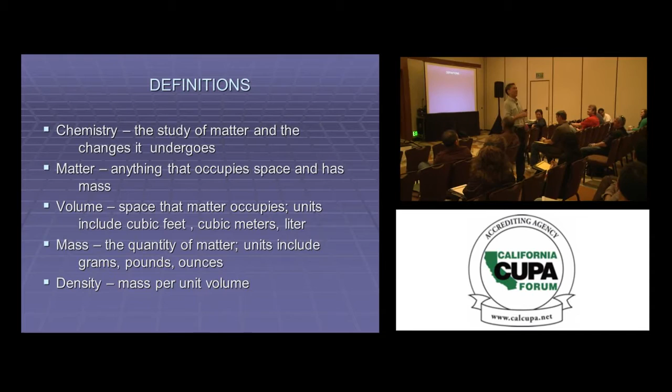So, and before I make fun of them, who are the lawyers here? Okay. Are you a prosecutor, ma'am, or I guess a freelance? I doubt. Oh, she dabbles. Okay. Okay, I won't make fun of lawyers because there's one here. So, anybody from CHP?

Okay. Let's start off with some definitions. Because you see, this is basic chemistry, okay? Basic chemistry. It will refresh your memory if you've had Chemistry 101 like, what, 10 years ago or something. To some of you, less than that.

I work for Los Angeles County, and I've been with the County of Los Angeles Fire Department, the Hazardous Materials Division, for 21 years. I started when I was 52. I just use a lot of moisturizer, okay? No. You see, there's a story there, because I've been doing this CUPA conference thing for 5-6 years now, and I've always said I've worked for Los Angeles County Fire Department for 21 years, and I always say I started when I was 12. And then there are blank faces, like, really? He's that young? So now I'm doing it the other way. Really? He's that old? But okay, I use a moisturizer. Like you, sir. Just kidding. Oh, it does work. Look at him. But no, there is a reason why people don't sit in the front, Margaret, but you did. So, suffer the consequences. Just kidding. Let's start off with some basic definitions. Again, this is basic chemistry, so let's start off with... am I too loud? Yes, for you, because you're in the front.

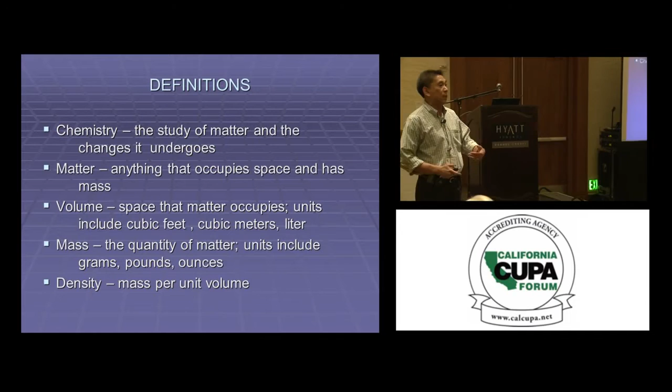To those of you who are nuclear physicists, are there some nuclear physicists here? No. Pounds is actually not a unit of mass, they say, it's a unit of weight, because it's the measure of gravity, but this is basic chemistry, so let's keep it simple. The units of mass can be grams, pounds, or ounces. Density is the mass per unit volume. Why do I go to the basics? Because as inspectors and emergency responders, you read material safety data sheets, you read the densities of materials, and you have to go back to the basics to determine if it floats, if it sinks, if it's heavier than air, and so on.

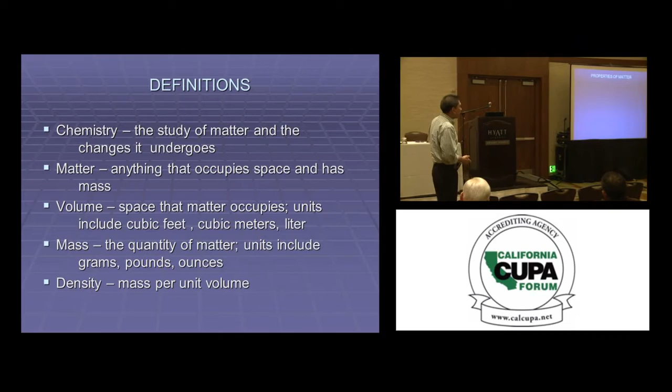Now, since we are talking of matter, let's talk about the properties of matter. How many physical states of matter do we have? Sir, how many physical states? 3. He said there are 3 physical states of matter, and those are solid, liquid, and gas. For basic chemistry, correct. And you're saying no, there are not 3 physical states of matter.

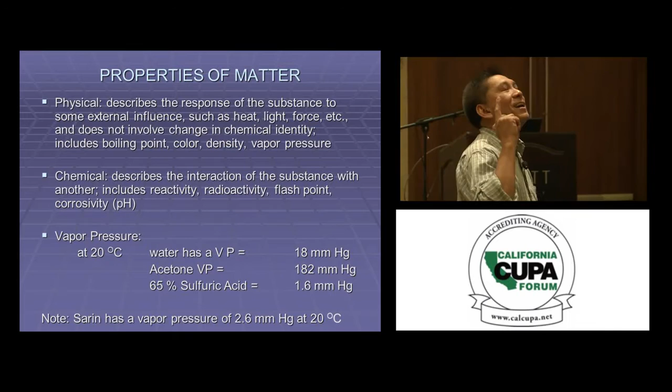And you are? What's your name, sir? Jose. And you are from? San Diego County. Where's Mike Vigier? Is he here? No, good. So I can make fun of him. No, I can't make fun of the chief.

So you're saying it's not 3 states of matter. So how many are there? 4 plus? Possibly 5. Actually, the nuclear physicists are coming up with, well, what about the flame? The flame itself is not solid, liquid, or gas. It's something else. But this is basic chemistry, so we return to what he said. There are 3 physical states of matter: solid, liquid, gas. But those solids, liquids, and gases have properties. And what are their properties?

Physical properties describe the response of the substance to some external influence, for example color, density, vapor pressure. Chemical properties describe the interaction of the substance with another: reactivity, radioactivity, flash point, and corrosivity, which we'll talk about with pH later. Now, as far as properties are concerned, if there's anything you will learn from this class, it is this: the vapor pressure.

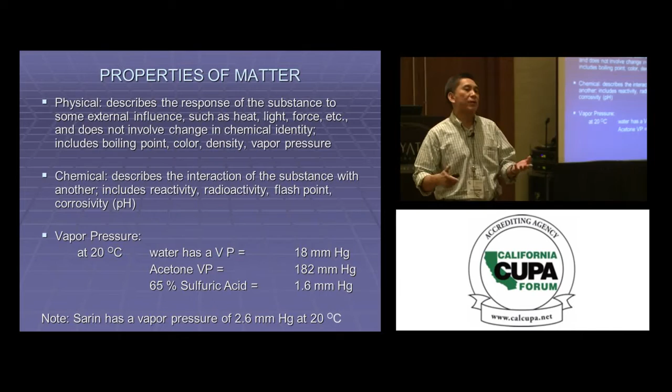Water has a vapor pressure of 18 millimeters mercury. Acetone, you know how acetone evaporates readily, has a vapor pressure of 182 millimeters mercury at 20 degrees centigrade. And concentrated sulfuric acid, 65%, is 1.6 millimeters mercury. Okay? That should not happen, but okay.

So all you need to remember for vapor pressure, when you're reading a material safety data sheet, an MSDS, when you're going to an inspection, is 2, 20, and 200. If it's closer to 200 millimeters mercury, it evaporates very readily, right? Now, if it's closer to 2, it doesn't really evaporate that much, like sulfuric acid.

But as hazardous materials specialists, you have to understand that even if the vapor pressure is close to 2... Sarin has a vapor pressure of 2.6, so does that mean I can come close to sarin? Of course not, because the toxicity is really, really high. A very, very small concentration of sarin can give you detrimental effects to your health, okay?

Speaking of which, there's an introduction to toxicology class on Thursday. I just met the instructor. Don't go there. No, I'm just kidding. She's a doctor for NOAA. Her name is Karen somebody. She's very nice. I will attend her class, so I'm inviting you to join me, to support her. I don't know her. Anyway, going back to vapor pressure.

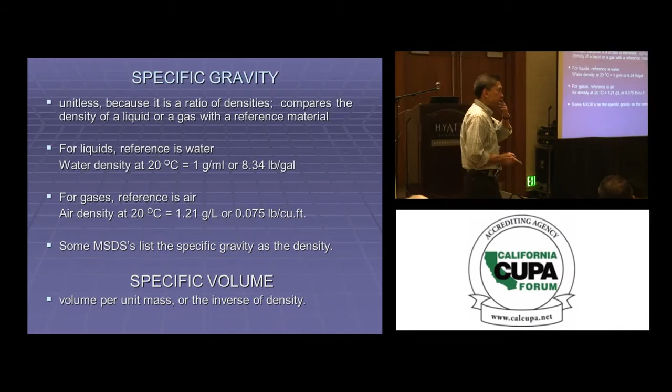Okay, for gases, the reference is air. The air density is 1.21 grams per liter or 0.075 pounds per cubic foot. Some MSDSs list the specific gravity. This is one of the errors MSDS writers make, because specific volume is just the opposite of density, but sometimes they list it as density when it is actually specific gravity. They put density equals 1.5, and there's no unit because it's a specific gravity. It's not a density. Okay?

Now, chemistry is the study of matter, so we have to, I wonder if we can pause this. Does anybody know PowerPoint? Of course you do, but you won't help me, right? I'm on my own. Where's Carl? Carl Palladino was here in the previous class, and he helped the other guy. But anyway, I hope it stays.

Matter can be divided into 2, pure substances and mixtures, and mixtures can be divided into 3: heterogeneous mixtures, suspensions, and solutions, and the pure substances are elements or compounds, right? I usually talk about heterogeneous mixtures and suspensions to get them out of the way. Heterogeneous mixtures are mixtures of pure substances, and if you take a part from the top and a part from the bottom, it's totally different. They have different concentrations, different composition. It's not homogeneous. It's not identical.

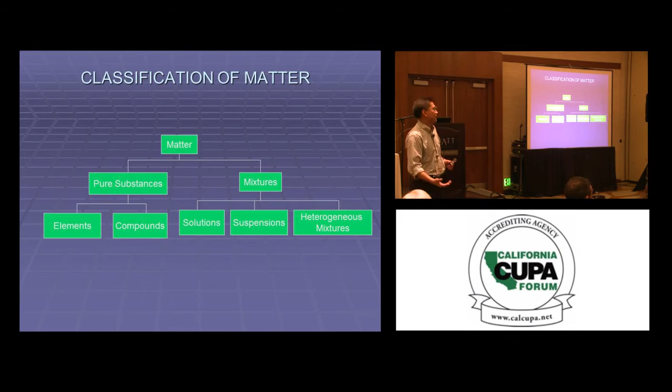You know, the people standing at the back, there are plenty of seats right in front. Join Margaret so I can pick on you. No, I'm not going to. I promise I won't pick on you. There are actually seats here and there. Please. We will pause the presentation for these latecomers. I'm sorry. Those who drank coffee first before coming to our class. No, thank you. Thank you very much for coming, actually.

Sorry. Okay. So heterogeneous mixtures, that is very clear. A mixture wherein there are three states of matter is a heterogeneous mixture. If there's a solid, a liquid, and a gas in the water, like beach water. Beach water has solids in it, it has dissolved oxygen, which is a gas, and then there's the liquid, the water itself. That's a heterogeneous mixture. That's beach water for you, especially Santa Monica beach water.

Ooh, that is really a mixture, right, sir? You're from what company? I'm with the Environmental Training Center. Oh, Environmental Training. You're home-based where? I know as much as you do, so be careful.

Whoa! But I have the microphone. There you go. Because he said that he knows the same, as much as I do, or maybe even more, but I have the microphone, you see. That's my...

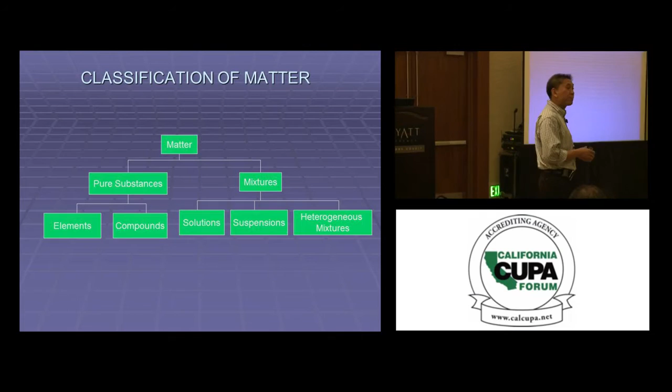Okay, suspensions. Suspensions, that's kind of a special classification of matter for me, because I know some of you have heard this already before, maybe from my previous chemistry.

Oh, it did. Thank you. Thank you, God. Thank you very much.

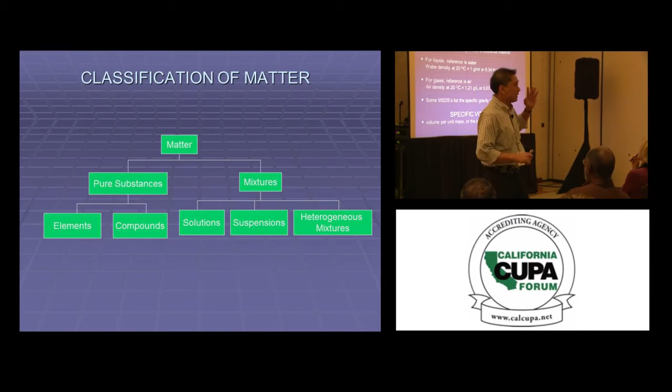From my previous chemistry courses, I always talk about my son, because my son is allergic to a lot of different things. And one of the things that he's allergic to is milk. Milk is the most basic example of a suspension. So meaning there are solids suspended in the liquid, right? There's butterfat that's suspended.

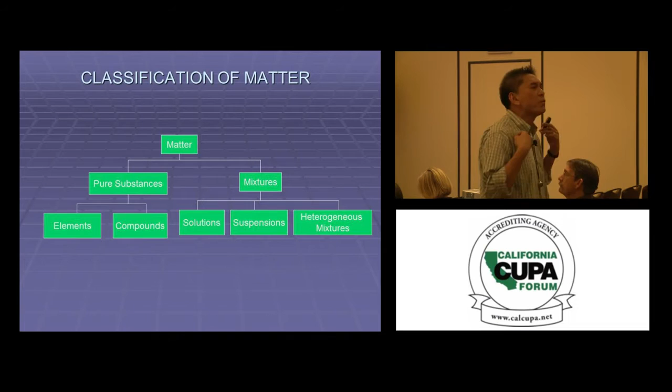Now, if my son wants to eat Jell-O, and we find some Jell-O that's kind of cloudy, then we know there's milk in it. But if it's red clear, it's strawberry or whatever flavor, but it's not cloudy, then there's no milk in it. He can eat it. So that's why I always give it as an example.

Another example is if you have an organophosphate. Most of you are inspectors, right? And you inspect. Is that ours? No, that's not ours, huh? Let's just all riot and then, okay.

Anyway, my point is, organophosphates emulsify. If you drop something into water, it just emulsifies and makes it cloudy. And that is an emulsion, and that is a suspension, okay? So we're done with suspension and heterogeneous mixtures. Now we go to the elements and the compounds.

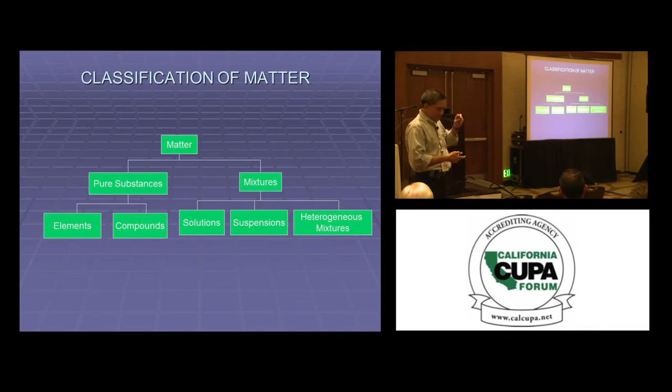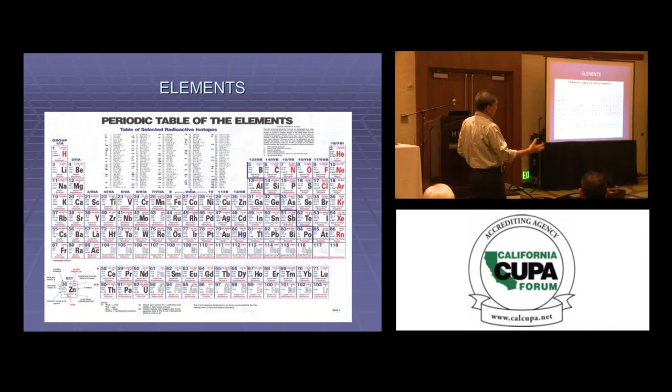Thank you. Now, when there's a periodic table, we have to talk about the elements, the atomic number. What is the atomic number, James? The number of atoms in that element.

Is that me? It's next door. It is next door. Okay. Because I don't want to alarm these two gentlemen who know as much as I do. I keep an eye on you.

Atomic number is actually the number of protons in the nucleus. And if the element is a free element, if it's a stable element, it must have the same number of electrons. Okay. It must have the same number.

Everything is screwy every time I make a presentation, so bear with me, okay?

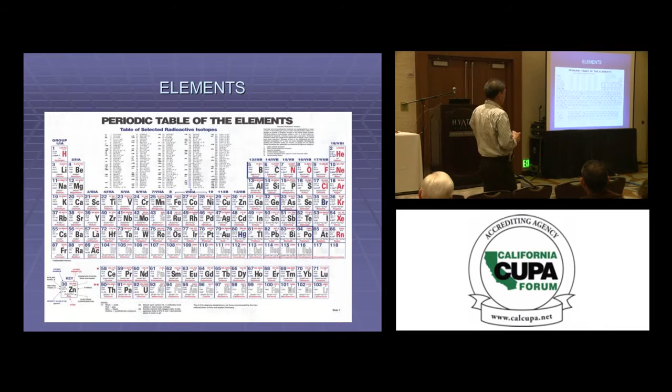On the periodic table, on the left-hand side are the metals, and the right-hand side are the non-metals. And at the very end of the non-metals are the noble gases. The noble gases on the very end have 8 electrons in their outermost shell. What is an outermost shell? The outermost shell is the area where electrons are active, meaning they can be shared, they can be transferred, they can be given away, and so on and so forth.

But the thing is, the group 8 noble gases, they are very, very stable, okay? So all these other elements would like to be a noble gas.

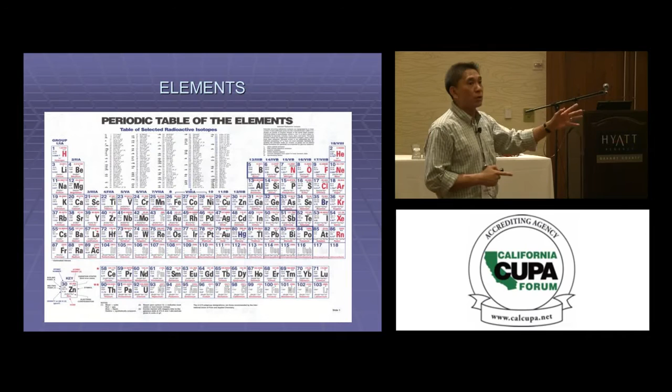I mean, I would like to be as noble as he is, but is he noble? That's the question. We will find out later, right, sir? What is your name, sir? Will Powers. Will Powers, really, that's a very strong name, but Comandante is stronger. Anyhow.

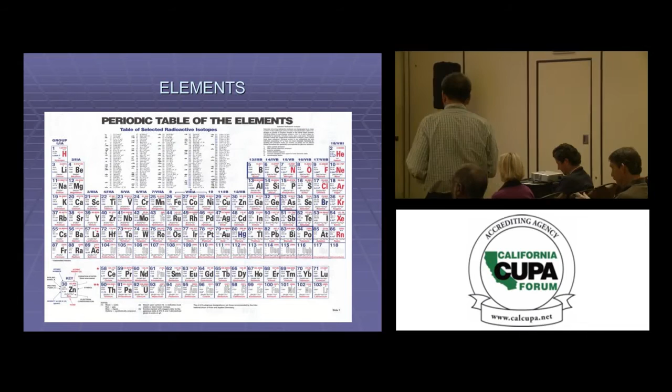Okay, so all these other elements have their protons and electrons, but they want to be as stable as the noble gases. So if they have 7 electrons in their outermost shell, they just want to take one from somebody else, like James would do. Right, James? You will just grab one, just so you can be stable. But sometimes Margaret, instead of taking one, will give away all of her 7 because she's a giving person, just to make sure that the outermost shell will still have the stable number of electrons.

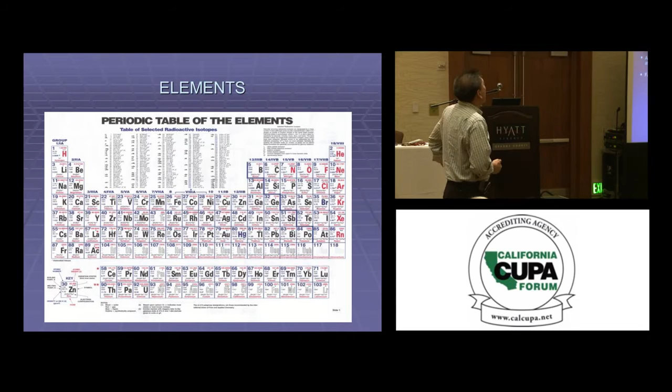And that's what happens in making compounds, right? We talked about the atomic weight, atomic number. That's not very important. Does anybody need to know that? No. Okay, go. Oxidation states. The oxidation states are the charges the ions carry, okay? If they are positive, they're cations. If they're negative, they're anions, right?

Now, meaning if James took 1 electron from Margaret, he will have 1 electron more than he needs to balance his state of being. Like if he has 7 electrons and 7 protons, the positive versus the negative, it will actually just balance itself out, right? But then if he takes in another extra electron from Margaret, he will have more negative particles than the positive particles. So he will be a negative ion.

And he is. He seems negative to me. And Margaret seems positive. You see, that's a trick there.

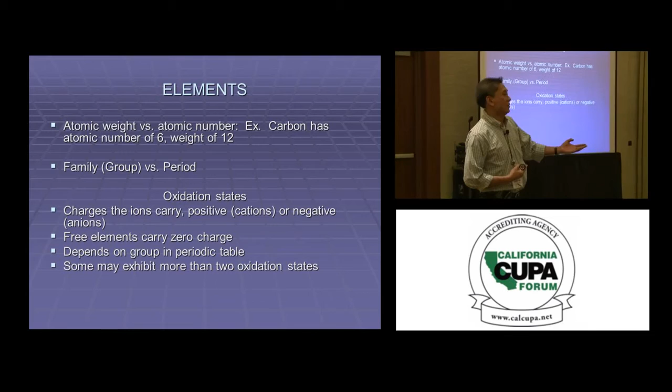Anyway, free elements, I told you, carry 0 charge, and it depends on the group of the table, the vertical structure of the periodic table. If it's group 1, then it has 1 electron in the outermost shell, so on and so forth. Some may exhibit more than 2 oxidation states, meaning those transition elements in the middle, because they have so many electrons in more than 3 shells, right? So those electrons can just jump from one shell to another.

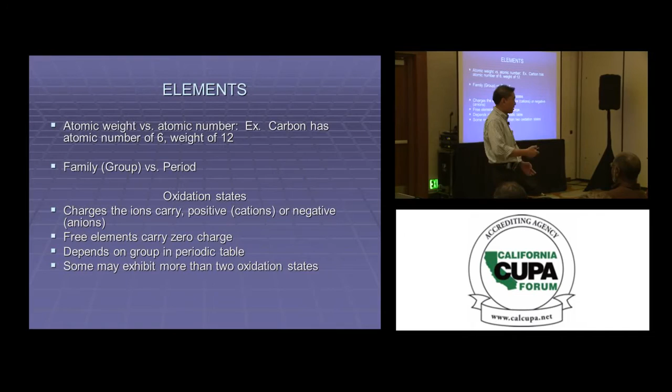Now, the compounds are made based on the octet rule. As I said, they want to be stable. So they want to get 8 electrons because they think they will be stable, because the noble gases have 8 in the outermost shell. So that's what James does. He just takes away 1 electron. The bonds may be ionic or covalent. Ionic means you just really give it away.

But then sometimes Margaret and James are very friendly with each other. Are you? No, they're not. They're not. They don't even share anything.

Compounds can be salts or non-salts. A salt is a metal plus a non-metal. Usually they are solids. Non-salt is made solely of non-metal atoms. Remember, we talked about the periodic table. The left-hand side are the metals, and the right-hand side are the non-metals. Now, if the compound is made only of atoms on the right-hand side of the periodic table, then that is a non-salt. And it could be organic or inorganic.

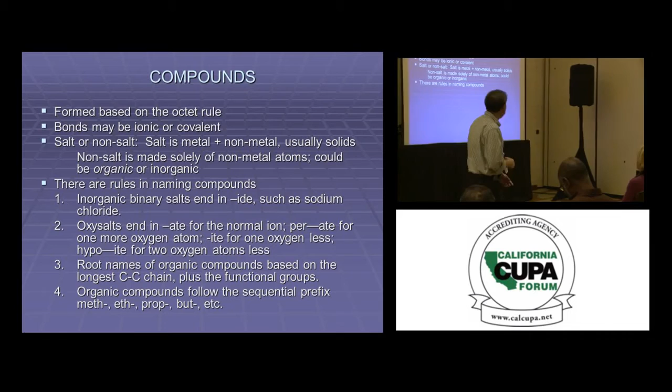Organic, we'll tackle that later because Margaret took organic chemistry like 15 years ago. No, not 15 years, it's 6 years ago, Margaret, right? Oops. Okay. I told you don't sit there. No, she was the very first one who came in, and then I got to talk to her, so. What is your name, sir? Dan. From San Mateo County. San Mateo County, okay. Okay, Dan, watch out. Oops. Where are we now? Compounds, there.

There are rules in naming compounds. Again, what we're touching on are really basics, and then I'm going to tell you stories about my incidents. This will help you, hopefully, when you read MSDSs and when you inspect facilities with exotic gases, exotic chemicals, and things like that. Inorganic binary salts end in "ide," such as sodium chloride. Oxysalts end in "ate" for the normal ion. Permanganate or perchlorate for one more oxygen than the normal ion. "Ite" is one oxygen less. Hypochlorite is the only one that I can think of, for 2 oxygen atoms less.

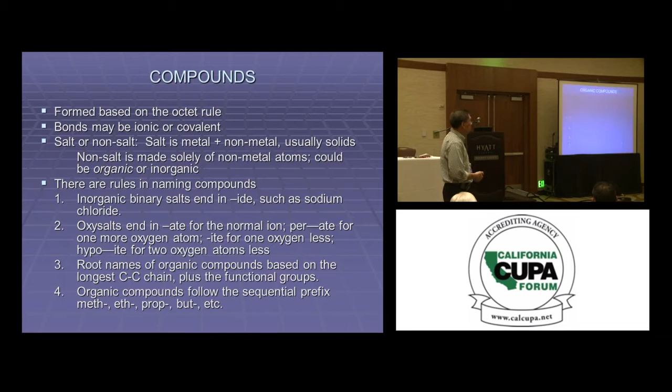Next, the root names of organic compounds are based on the longest carbon-to-carbon chain plus the functional groups. We will talk about the functional groups later. Organic compounds follow the sequential prefix meth, eth, prop, but, like methane, propane, so on and so forth. Now we talk about organic compounds. There are 2 types, the hydrocarbons and the hydrocarbon derivatives.

The hydrocarbons consist only of hydrogen and carbon, and they end with ane, ene, yne, and diene. And the main hazard is flammability. Some are highly toxic, like benzene, which is a known carcinogen. And then some of them are explosive also. Acetylene, calcium, not calcium carbide.

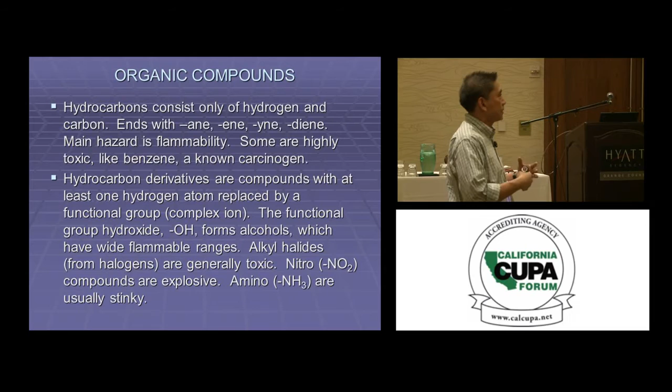But the ones with a triple bond between the carbons, when they are sharing too many electrons between each other, there are 3 bonds, then that is quite explosive. Because the most stable hydrocarbons are the ones that are saturated hydrocarbons, meaning they're saturated with all hydrogen atoms around the carbon atom. Then there are the hydrocarbon derivatives.

These, again, this is just for you to familiarize yourself with the names of chemicals out there so that when you read MSDSs, you don't feel lost.

Oh, no, I'm sorry, like Dan. Right, Dan? Yes, he reads MSDSs. What is this ion?

Anyway, so hydrocarbon derivatives are based on the functional group. Hydroxide, the OH, those form alcohols, which have wide flammable ranges. Now, alkyl halides are generally toxic, like perchloroethylene, trichloroethene, trichloroethane. As long as you have some halogen in it, it makes it toxic. Nitro makes it explosive. TNT.

What is TNT? TNT, Mr.? Trinitrotoluene. And you actually pronounce it correctly, sir.

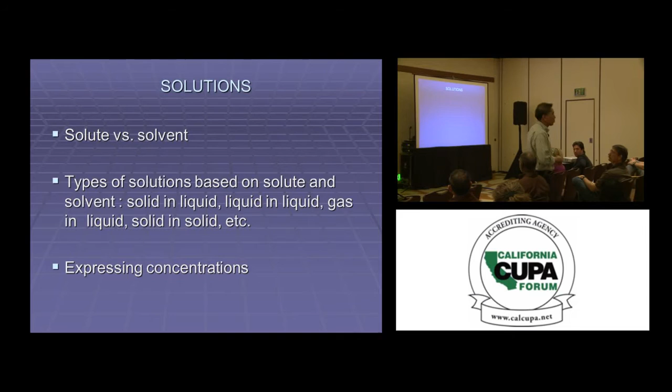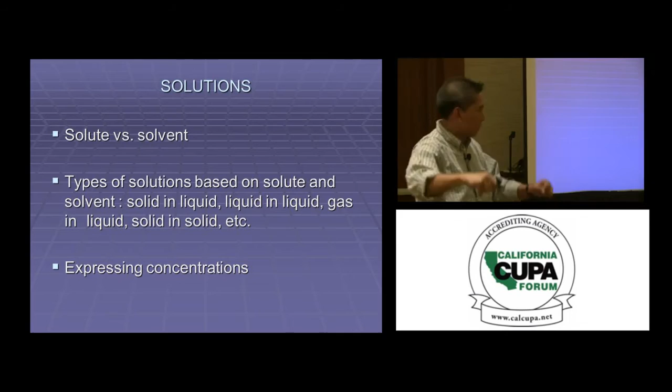All right. Now, the type of solutions is based on the solute and solvent, solid in liquid, expressing concentration. This is the most important part for solutions. We talked about the elements already, and we breezed through the elements. Now we're breezing through solutions.

I remember when I was in middle school or high school? I don't remember now, because I'm 73 years old. I use a lot of water.

When we talk about solutions, the main subject is ways of expressing concentrations. And for goodness sake, you need this. You need calculations in hazmat chemistry, because this is by far the only thing that you need for solutions. You need percent concentrations by weight. You need to know about molarity. You need to know about pH. pH is the negative logarithm of the hydrogen ion concentration.

Molality is not used much, but in one of my incidents, I had an ice making company that has a salt solution, and he has to express the solution in terms of molality, because that gives him an idea of how far below 0 degrees centigrade he can go to freeze the ice, okay?

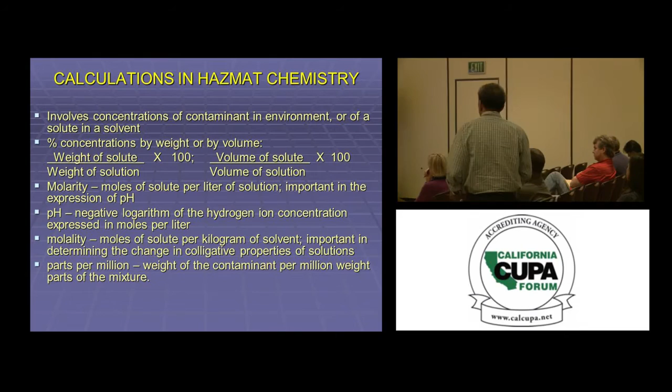And for the most part, you need to know about parts per million. Parts per million is weight of contaminant per million weight parts of the mixture, or maybe volume units also, but for the most part, it's weight of the contaminant per million weight parts of the mixture. Now, in order to understand ways of expressing concentrations of solutions, you have to go to dimensional analysis. You have to understand that. All these you have to be familiar with.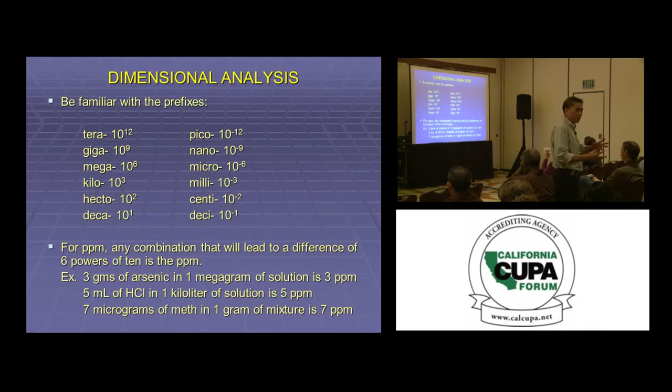Thanks to Apple, iPad, and all this digital technology, now we know about nano. And we know about giga. Now I know about tera, because there's an external hard drive on sale for $500, 1 terabyte. Is it $500? No, it's only $200. Jose, you're overpricing. No, it's only like $99 for 1 terabyte. So it's 10 to the 12th.

Now for ppm, any combination that leads to a difference of 6 powers of 10 is parts per million. So if you have 7 micrograms of meth in 1 gram of mixture, that is 7 ppm. Why? Because the difference in powers of 10 is 6. There are micrograms of meth in 1 gram.

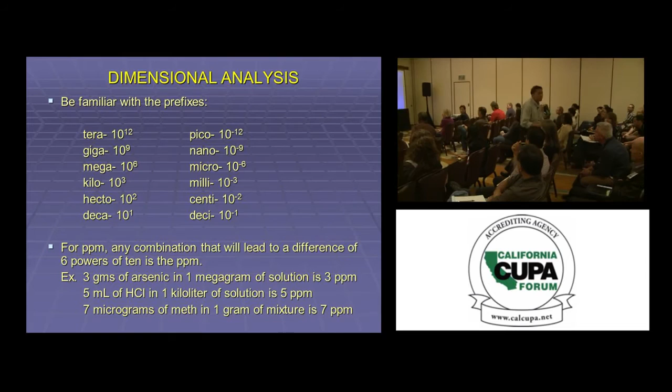Is that correct, sir? What is your name, sir? Jed. Jed? And you're from what county? City of Vernon. City of Vernon. We're practically neighbors, Jed. I'm from Los Angeles County. I should see you. And I asked him because I was in the mode for meth, and I saw him.

I just saw him because he's right here. What are you implicating? Nothing. Okay. Sorry, okay? Are you a lawyer, by the way?

No? Okay, good. Okay. Be familiar with the conversion factors. I'm sure you are all familiar with this. But again, remember, this is basic chemistry, okay?

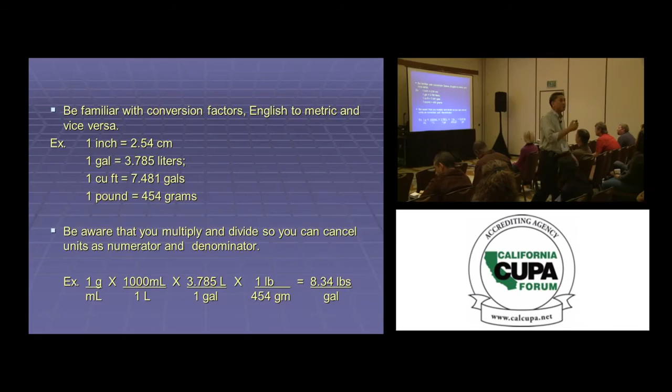Buffer solutions. Buffer solutions is a mixture of a very weak acid and its conjugate base. For example, acetic acid and sodium acetate. When you mix it together, any acid that you add or any strong base that you add, it will not affect the pH. That's why it's called buffer solutions. Let me see. You know, like a buffer is like some sort of a shock absorber, okay?

So you do know that, for example, if you have 1 gallon of, let's just throw it out there, maybe pH 5 of a solution, and then you add 2 drops of concentrated hydrochloric acid, the pH will go down, right down to pH 1 because it's logarithmic. Remember, what do you call this? The ways of expressing concentration. pH is the negative logarithm of the moles per liter of the hydrogen ion concentration.

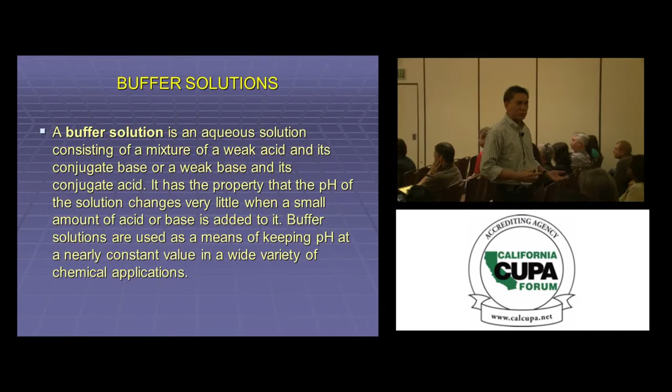And now, anticlimactic again, I again prepared for this line, but what can I say? This thing is not cooperating with me. My buffer solution in life, I am so stressed actually at work, I'm stressed. Can't you tell? I just use a lot of moisturizer. But this is my buffer solution. My son and my 13-year-old daughter. Wait, you were supposed to say, "Aww," because you see the problem is it was anticlimactic. I know. But who has 13-year-old girls here? Can we talk afterwards? I really need help. Can't you tell I really need moisturizer? Because I mean, she looks fine, right? But then at home, it's another story. Okay.

Now, this thing here is the video, but it doesn't work on the PowerPoint, so I have to.

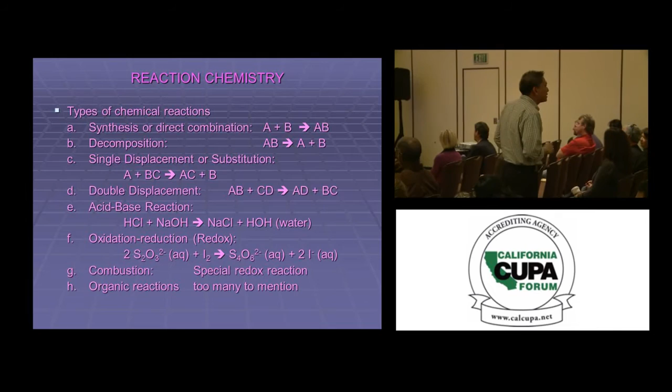What can I say? I can only be good in one thing. That's what my wife kept telling me. She laughed. Why did she laugh at that joke? You're not supposed to laugh there because it's about my wife and it's about me.

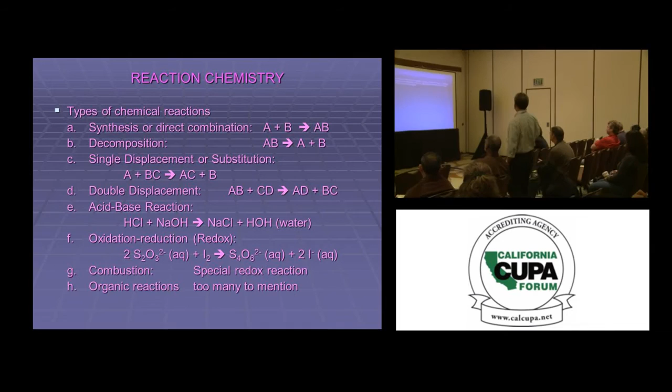Anyway, combustion, which is what happens with the gasoline tanker, is a special redox reaction, okay? Oxidation reduction reaction involves a change in oxidation state. The oxidation state of free elements is 0. Some elements may exhibit more than 2 oxidation states. We talked about that. This is just a high school chemistry thing. The oxidizing agent, which is the oxidizer, gains electrons, GE is for gains electrons. R is for reduced. Oxidizing agent is for OA.

So that's just to give you an idea of which element is gaining electrons and which element is the one reduced. Non-metals usually act as an oxidizer, and the metals act as reducing agents. Group 1 metals react violently when oxidized. And then the activity series gives you an idea of which metals can release hydrogen from water or can release hydrogen from acid.

Combustion, which is what we saw in the very first video. We have slow versus rapid combustion. Just keep in mind that the sudden evolution of gases creates excessive pressure. When there's the reaction, that will give you a big bang, which is what we got at the titanium fire. Slow combustion takes place at low temperatures. It occurs at the molecular level.

Actually, I don't have that incident anymore in the PowerPoint presentation, but I had an incident where there was a spontaneous combustion. It does happen, spontaneous combustion. Right, Jose? Yes, correct answer. It does happen. But spontaneous human combustion, does it happen?

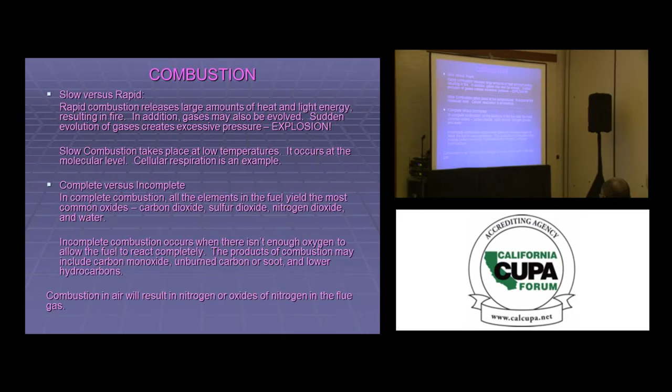Incomplete combustion, complete combustion: all the elements convert to carbon dioxide and the common oxides of the elements. But if there's incomplete combustion, that is the problem, which we will tackle with the tanker fire at Freeway 60. Combustion in air will result in nitrogen or oxides of nitrogen in the flue gas.

Now let's talk about the more interesting part, right? When I tell stories about the incidents that I go to, okay? We will talk about the tanker fire on the 60 freeway, the aluminum powder, which is actually my favorite incident of all time, and I will tell you why. Remember, I've been with the county for 21 years. I did emergency response. I was responding to incidents for 11 years. So I did get quite a bit of chemical incidents.

And I usually relate it to chemistry, because there's always chemistry around us, especially since we're in the environmental health field. It's a good thing that you came in numbers. That's good, thank you. Because they always say, you don't need chemistry. No, you do. You cannot remove chemistry from hazardous materials. Does everybody agree there? You cannot remove chemistry from hazardous materials.

And when I go to an incident, I see, is there chemistry involved? And actually, there's always chemistry involved. But sometimes it's just so common that it's already automatic, that you don't need to do any kind of thinking or research in your head. So we will tackle the tanker fire on the 60 freeway, the aluminum powder incident, food grade chemicals. We had a recent incident on food grade chemicals.

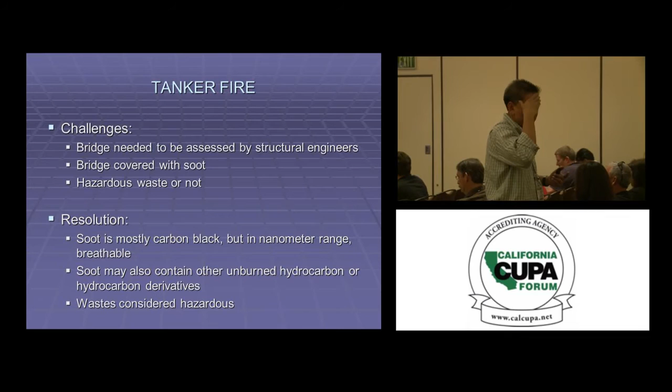Even if it's the fire chief you saw in the video, it was actually I who was there in all the executive briefings from the engineers, the transportation, the Caltrans engineers who will make the decision on what to do with the Paramount overpass, okay?

So everybody's challenged. First, the bridge needed to be assessed by structural engineers. Now, we need to know what the products of combustion are. What do you think are the products of combustion for gasoline?

Yes, ma'am. You are from what county? Santa Clara County. Santa Clara County. I know some people from Santa Clara County. And your name is? Chelsea.

Chelsea. What do you think is a product of combustion of gasoline? Huh? Petroleum hydrocarbons. Correct. Petroleum hydrocarbons. Because sometimes they break it down to carbon dioxide or other oxides of nitrogen, but sometimes it just keeps it as is. And that is the problem. Because we only know that the smoke is just full of soot.

Were you surprised that your answer was correct, Chelsea? No. Wow, she's very confident.

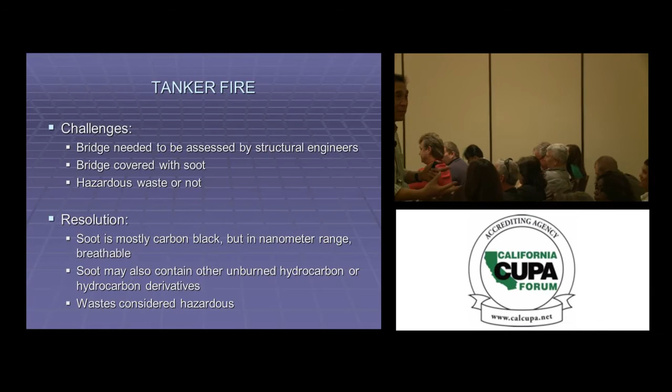No, you see, yeah, because there are petroleum hydrocarbons. 80% of soot is what? Pure carbon, elemental carbon, okay? Pure carbon. But soot still has some unreacted petroleum chemicals, petroleum hydrocarbons, which is what her answer was. She answered the 20%, I'm answering the 80%.

So it's elemental carbon. So the bridge is covered with soot. And now the soot, we don't know if there's benzene there or if there are other petroleum hydrocarbons there. So we had to make sure. So the question was, is it hazardous waste or not? If it were just elemental carbon, would it be hazardous or not?

Who's a hazardous waste inspector here? I know Jose is a supervising hazardous materials specialist, right? Somebody, come on, be brave. Who is a hazardous waste inspector? No. Okay, then I point. You, sir.

If soot is just pure elemental carbon, would it be hazardous waste or not? It would not be hazardous waste. Can you please explain? And your name is?

Jim. Jim. Sorry, but nobody raised their hand, Jim, so I have to point at you. So, Jim, I'm sorry to put people on the spot because that's just me. I'm sorry. No, but then I help you anyway. I help you, okay? I help you.

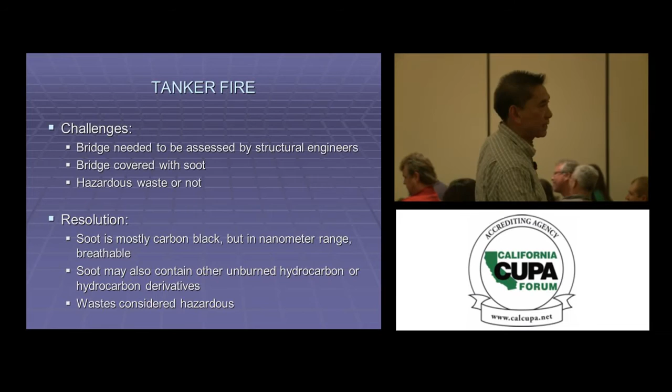Correct. It's not. It doesn't exhibit characteristic waste or any listed hazard, which is hazardous waste 101. It's very, very elementary, basic. If it does not exhibit any of the characteristic waste, or it's not listed under the F, K, U, P lists, then it's not hazardous waste.

Elemental carbon. Well, it depends on the size. If it's very, very small, micrometer or nanometer situation, then maybe it's a possible hazardous waste because it might get ingrained and might cause inflammation and so on and so forth. But in order to find out, you have to attend Karen's Introduction to Toxicology class. Remember in the class?

Sorry, nobody's listening to me now. Okay, hey, this is the more interesting part of the lecture, okay?

So those are the challenges. Now, what is the resolution? Soot is mostly carbon black, but it's in the nanometer range. Some of them are in the breathable range. Soot may also contain other unburned hydrocarbons, which is where Chelsea's answer came in.

Oh, you know what? You saw this slide, Chelsea, huh? That's why you know. I'm just kidding. You're just smart. I know you're smart. You actually look smart, Chelsea. Unlike some people I know who use moisturizer. I'm just kidding, Margaret. Okay, because she's at the front.

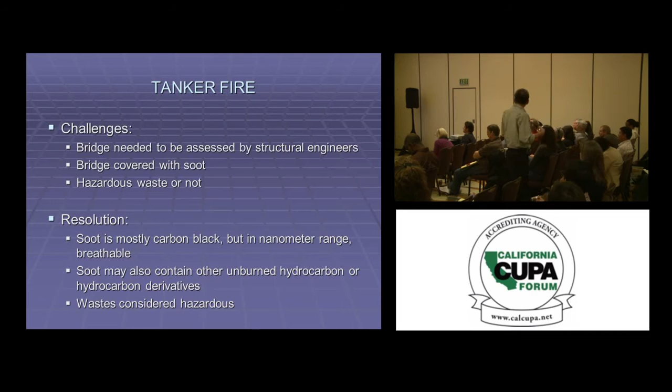Anyway, we have to make a decision on what to do with the soot. The construction engineers, the people who will actually assess the bridge, they're not hazmat specialists. They're structural engineers. They're not HAZWOPER trained. They don't know chemistry, maybe chemistry 101, but that's about it. So they cannot be exposed to hazardous materials or hazardous waste. So we have to clean it up first.

But the question is, if you clean it up, you need to find out whether to collect it as hazardous waste or not. And we made the decision, because 20% might be unburned hydrocarbon, we have to address it as hazardous waste.

Now the next question, since it is in the nanometer range, the contractor, I won't name names, Ocean Blue, sorry, I just did. I know their intention is great. They are after public health too, but sometimes they go overboard, and we have to put a stop to things, because it might be a conflict of interest: if they do more, they can bill more, right?

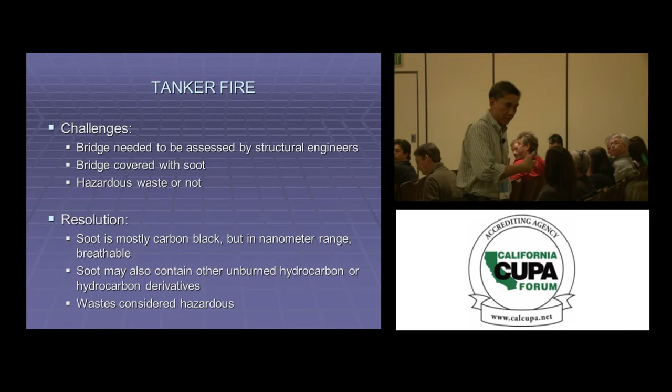So they suggested, it could be in the nanometer range, it's breathable, we can put curtains on the Paramount overpass so we can capture all the dust particles that fly out in the air. But if we do that, how much more time is it going to delay the entire operation? So we had executive briefings with the transportation engineers and conference calls, because this is, I'm pretty sure, over a $6 million project.

So we talked about the nanometer range, breathable range, and the thing is, it's going to happen at night anyway. So we said no to the curtains. We just pressure washed and made sure everybody is at a safe distance, so that everything that's wet is going to go down eventually. They're not going to be suspended in air like the aerosol in air we talked about.

Thank you very much, ma'am, for attending. Oh, she's coming back. I did that one time and it backfired, but anyway, that's my problem. The evaluation, please. What do you call this?

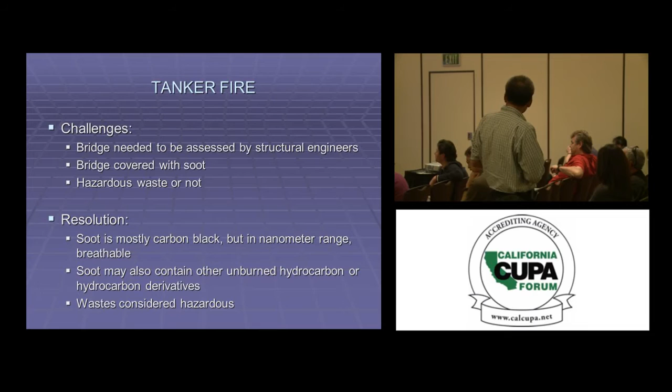So the resolution was not to bring in those plastic curtains to capture the dust particles, because we would make sure the public is at a safe distance, and we're going to do it at night when there's less chance of people getting exposed. And the tanker fire, we opened the freeway not the next day, but in 3 days. It took 3 days because they had to demolish it.

They had to demolish. Eventually, we cleaned it up, right? We cleaned up the overpass, the bridge, and the transportation engineers assessed it. And of course, you saw the video. You saw how intense the heat is, how intense the fire is. So the bridge must have been compromised. So they had to demolish the bridge. And so the freeway was closed for 3 days.

And then the freeway was open, but the overpass was constructed during the weekends only. Of course, they had to get the funding first and so on and so forth. And it did not open until like May of the next year. So it took around 6 months to build the Paramount overpass. So that's what happened with the tanker fire.

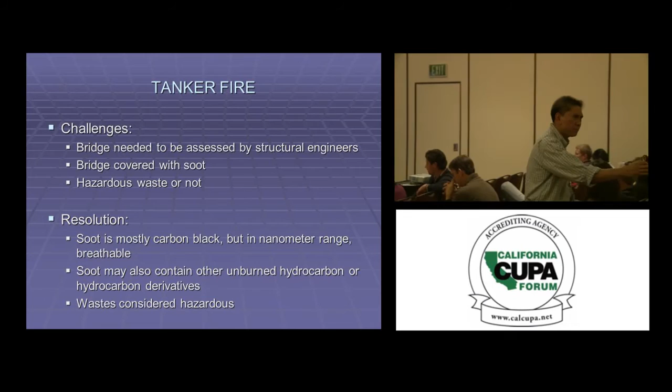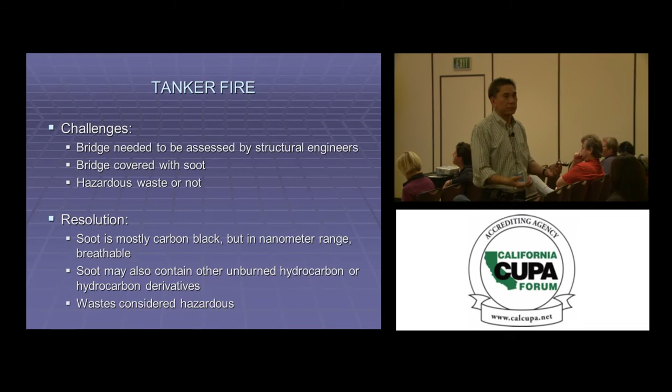And again, there's chemistry all over it. It's nice to be part of the executive briefing when you know what you're talking about. If I did not know what Chelsea said, if it's just elemental carbon, and what Jim was saying, that it's non-hazardous waste, then I could have said, go ahead, just spray everything on and let it go, because it's not hazardous. But because I know what Chelsea knew, that 20% could be unburnt petroleum hydrocarbons or broken down petroleum carbons. Instead of a 24 carbon chain, it became a 12 carbon chain and so on, but it's still hazardous.

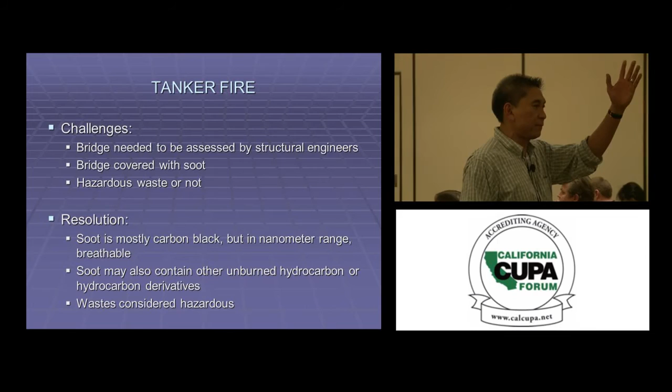Now let's talk about my favorite incident of all time. I don't know if you've heard about this favorite incident of mine, because it's an aluminum powder incident. Again, we're talking about a nanometer range of the powder. This happened at the peak of the foreclosures, like 2008 or 2009. I was asked to respond to a foreclosed home because some teenage kid was asked by a realtor to clean up the garage of a foreclosed home.

Actually, it's not a garage. What do you call those? Not a shed. Well, it's sort of like a tool shed, but it's bigger. And he saw this container. It's not very clear, but it says danger, explosion hazard, contains aluminum powder. But the thing is, we're in central Los Angeles, and it was in Lancaster, which was at least 2 hours away from us. You see, Los Angeles is big.

How big is Lake County? Very small. How big is your population? 2? No, 5. Oh, 62? And you're here, so only 61 are left there? No? 62,000, okay. Because in LA, we have more than 10 million people. And so that's why our houses are like this, next to each other.

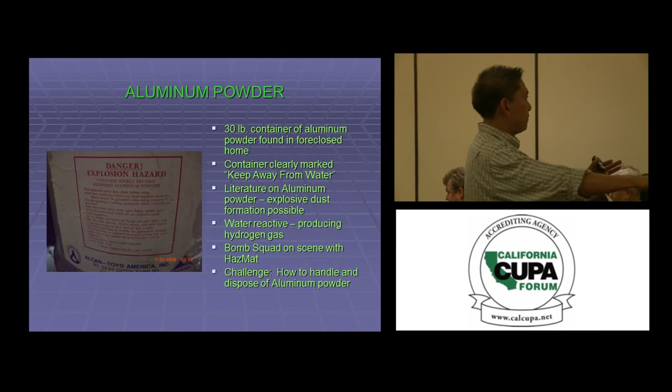I went to Florida for Christmas. Why am I telling you this? Because I want to. Anyway, I went to Florida to visit my wife's family. I wonder why, right? They don't like me, but I was forced to go. And we went to a restaurant at the top of a building with a view of the city, Jacksonville, in northern Florida. I don't know how many stories, maybe 27. No, just kidding. But all I saw were trees. I said, you have too many trees. Where are the houses? Oh, they're all covered, or they're like an acre apart. In LA, in 1 acre, you can have like 100,000 people. They're all crammed up, like a clown mobile, right? Everybody keeps coming out.

The same thing here in Los Angeles County, because of more than 10 million people. It's going to take me maybe 2 hours and 15 minutes to get to Lancaster because of traffic and all the congestion and all these people honking at me. Because I drive like an Oriental driver, okay? So don't drive behind me, nor in front of me, just stay away. Anyhow, okay.

It took me like 2 hours to get there, right? So the teenage kid already called his boss. The boss called 911 because of this danger, explosion hazard. So by the time I got there with my partner, actually my partner was a little delayed. I'll talk to my boss about that.

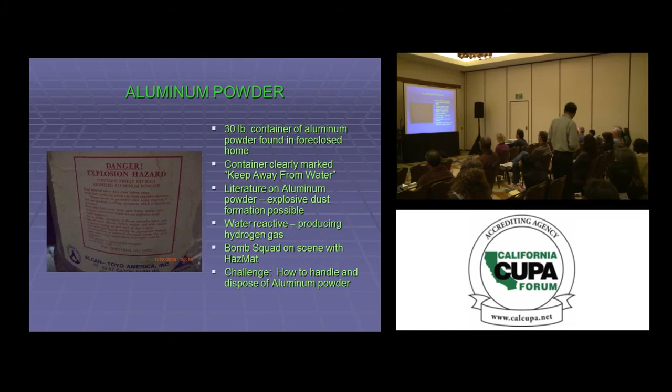So I researched everything and so on and so forth. So I know that it can create dust explosion, but it can also be water reactive.

And the main problem there is the, oh, I should be fast, because I have 3 more incidents to discuss. I talk a lot, huh? Ma'am, I talk a lot. Sorry. Nobody needs a break, right? No. Okay.

Because what is the resolution? Because I looked at all the literature, you cannot put water. Water will produce hydrogen gas for this aluminum. But we all know that we have aluminum cans and they get contact with water and so on and so forth.

Oh, they have somewhere to go. Look at them. Bye. You're welcome. You're missing a lot, ma'am. Oh, but it's okay. You see, my evaluation will go down now.

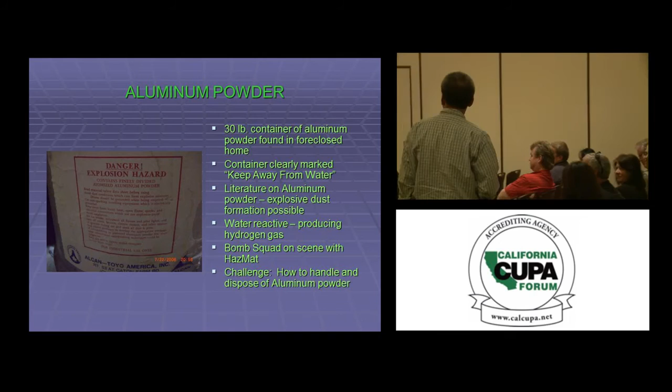It's okay. To avoid dust formation, you need to stabilize the powder. Okay? Meaning, you cannot just transport it dry, or else it will form dust, right? And if it forms dust, then it might have a dust explosion in your hands. To stabilize, meaning to avoid the dust formation, we can use water or cooking oil.

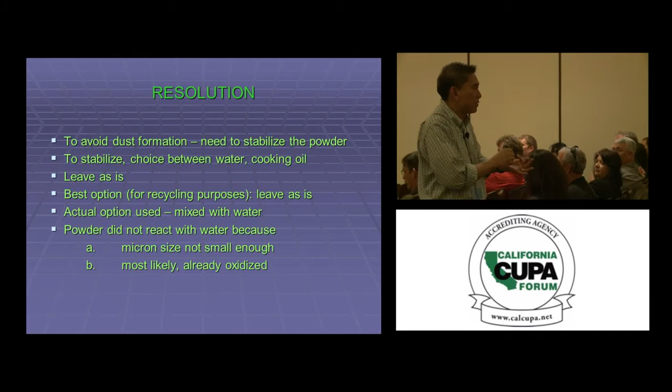And this is actually the nice thing about the crowd there, because we were talking, right? We were talking about hazmat, bomb squad, and so on and so forth. I told them that we have to stabilize because of the dust formation and so on and so forth. And then we said, why don't we do this? We do like a bench scale situation wherein we try first a few things with the aluminum powder, and if it works, then we go all the way with the drum, right?

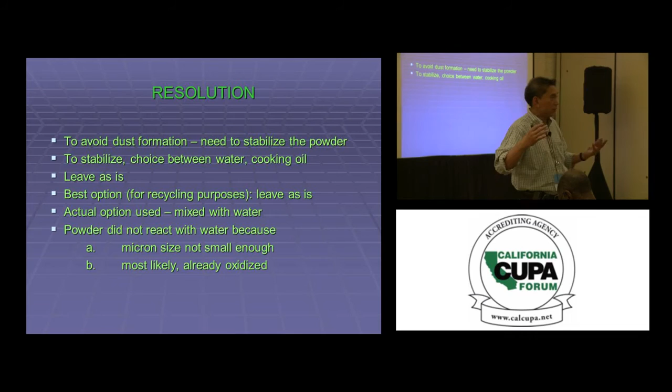So we said, how to stabilize it? We have to make it wet, okay? So what do we wet it with, right? So we told them, well, it says you cannot do it with water, but I have to stabilize it. I said, so maybe the most benign one is cooking oil. So we just asked the crowd, well, actually, I did not ask the crowd.

It's the bomb squad person with a badge and somebody looking like you, sir. And your name is? John? You're not from bomb squad, are you? No, okay. From where? Texas. You're from Texas? Wow, okay. But you're here now, right? And you represent what county? Whole state of California. Oh, you're from EPA? No. DTSC? Industry. Oh, from private industry. Okay, all right. I'm gonna pick on John now because he's not one of us. Just kidding, people. Okay, so not me, the bomb squad person who looks like John, but shorter. How tall are you? 5'11". You see, the guy behind you laughed because I asked how tall you were. How funny is that?

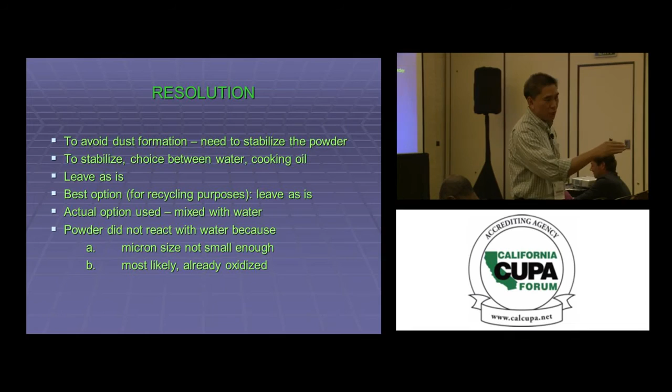Anyway, the guy from bomb squad, not as tall as John, asked the crowd, can somebody give us cooking oil? Whoa, and a lot of people just brought their cooking oil. They brought gallons and some bottles because they just want to get it over with, because the crowd is there and the fire trucks, so much nuisance to their neighborhood. So they brought out gallons of cooking oil just to check it. And I just need like a cup.

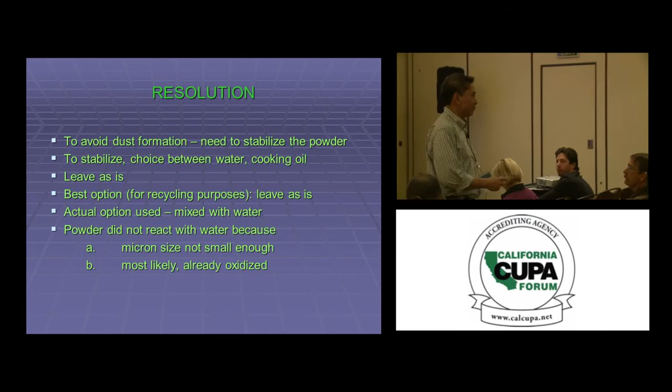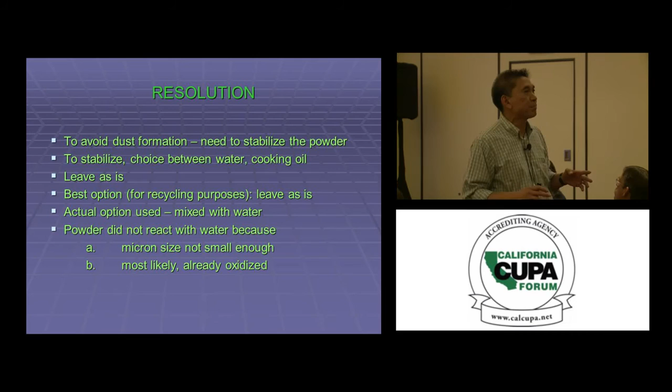The best option, though, in hindsight, is to leave it as is. Why? Because when we arrived, the container was already open. So that means it has already been exposed to air, and it could easily have been already oxidized. But the actual option that we used is to mix with water. I know for a fact that it would have been better to just leave it as is and just prevent it from forming dust. And how do you do that? Just by closing the container. Leave it as is, because there's no dust formation if you close the container, and there's no water reactivity because it has already been oxidized.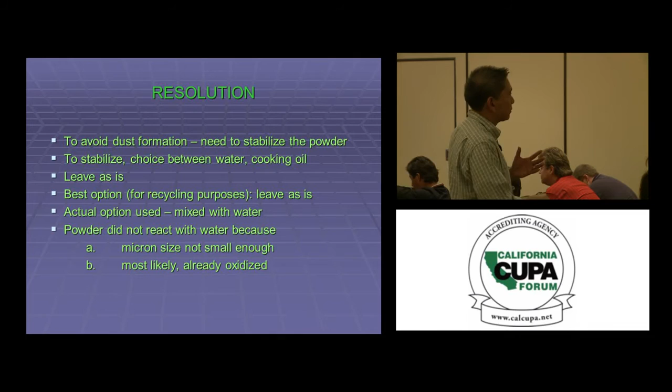But we mixed it with water because we did the bench scale experiment, Jose, that I talked about, in the watch glass. Of course, we were wearing PPEs, and we took a sample. We put a pinch on one watch glass, and then another pinch on another watch glass. We used cooking oil on one, and we used water on the other. With the cooking oil, since it was too thick, it doesn't readily mix with the aluminum powder, so we still had to agitate it and so on. So we said, not a good idea, because if you want to stabilize it with some liquid, it has to readily be absorbed or be wet, okay?

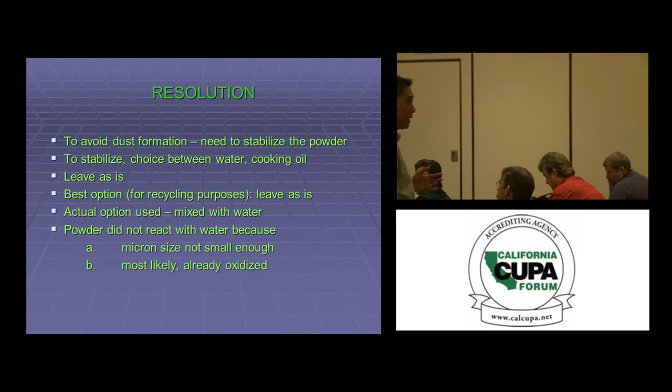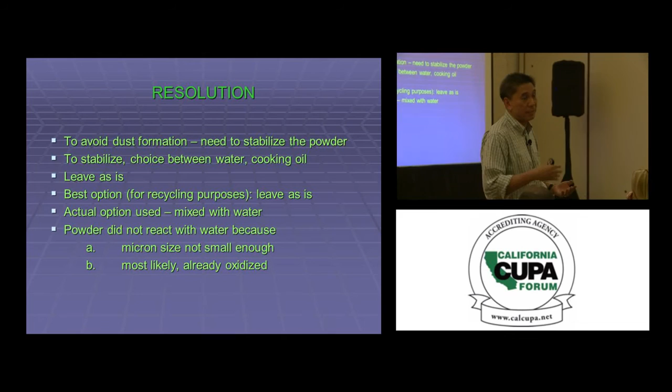And so when we did it with water, there was no spark, nothing, because it has already been oxidized. The surfaces of the powder have already been oxidized, so we mixed it with water. And you know why we did not leave it as is? Because there was a crowd forming, and the bomb squad was saying there is an explosion potential in your neighborhood. So we had to do something to pacify the crowd, to make sure that we are taking care of it. We cannot just leave it as is and wait for the cleanup contractor to arrive. And by the way, the cleanup contractor arrived the next day, because it was already like 12 midnight. So logistically, it was easy to do, but we had to do something. We had to mix it with water. The powder did not react with water because its micron size is not small enough, or most likely it was already oxidized.

Now let's talk about food grade chemicals. LA County. This one, food grade chemicals, courtesy of Brenntag Pacific Incorporated. It's a large chemical warehouse in Santa Fe Springs. Food grade chemicals is a whole different animal, if you don't know that yet, because they have their own regulations. They are self-regulated, not because of the hazard, but because it is going to be consumed by people, the public.

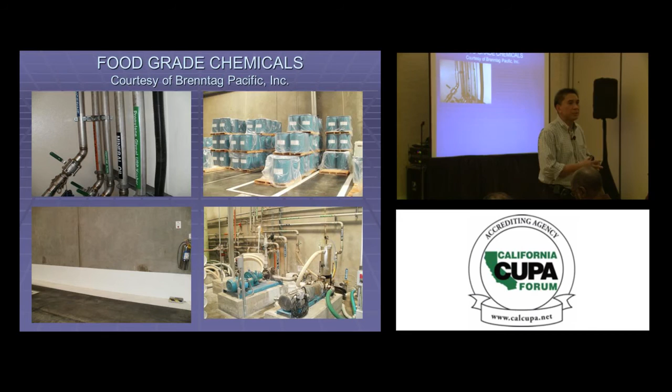And who used to be a restaurant inspector? Come on, somebody was a restaurant inspector. Yes, ma'am. Your name was? Caroline. Caroline, when it comes to food contamination, what contaminant is the most common for food? Bacteria. Correct. Bacteria.

Oh, she's a very good inspector. No, you're not? I'll talk to your boss. I'll change his mind.

That is what food grade chemical warehouses are all about. They don't concern themselves with what Jim knows about characteristic wastes. They concern themselves with bacteria. So they have dedicated pipes, dedicated rooms, they cover everything, and they have demarcation lines. And since they are food grade chemicals, some of them can be eaten by rodents and other vermin. So they have to make sure that no rodents are inside the warehouse. They have mouse traps and everything, and they have white borders on the corners of their warehouse to check for dirt where bacteria can grow, and rodent droppings and things like that.

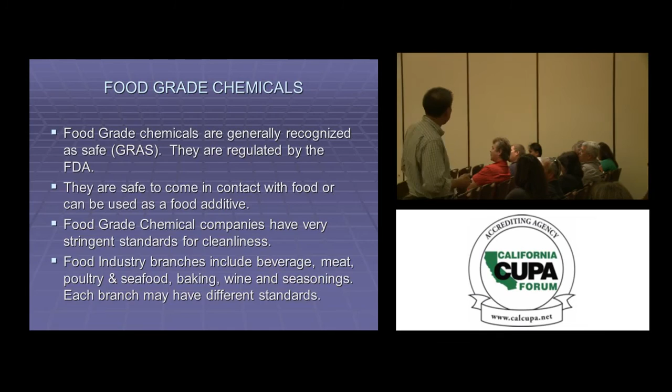Okay, so very dilute nitric acid because it has to be clean. So the thing is, the nitric acid that's dilute came from concentrated stuff, and that's what they keep. Some companies, not Brenntag Pacific. Brenntag Pacific was very cordial, and their operation is top of the line. And I owe them these pictures, so I have to say that.

Problem was, one company threw away food grade calcium oxide, and it caused a trash truck fire because of reactivity. Calcium oxide reacts with moisture. Food grade chemicals should be evaluated for their hazard characteristics before deciding on how to dispose of them. Just because they are clean and free of microbes or bacteria, or can touch food, doesn't mean it is safe.

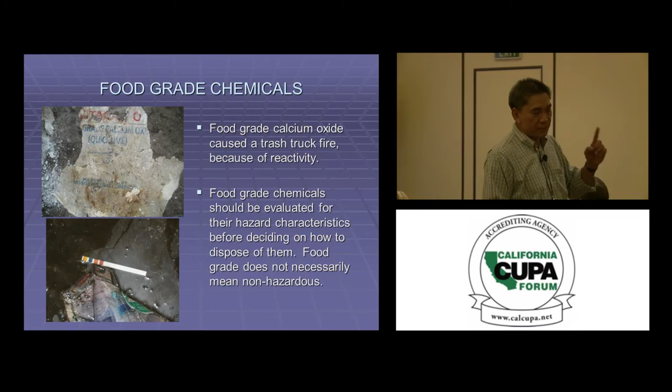Doesn't mean it's non-hazardous. And that's the lesson, because we responded to a trash truck fire because they threw away food grade calcium oxide in the regular trash, and they thought since it's food grade, what harm can it do? But then other stuff got in that is wet, wet papers, wet clothing, and so on. And it reacted and caused a trash truck fire.

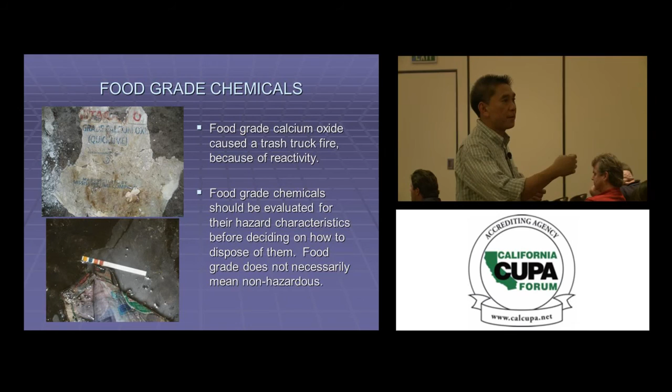Next, the titanium fire. Remember the video with the big explosion? The big explosion was in South Central Los Angeles. That's a YouTube video, actually. There was already a smaller explosion before that big one. It happened at a metal recycling facility.

And the metal recycling facility sorts their scrap metal into different metals. Name some scrap metal. Chelsea, name some scrap metal. Aluminum, yes, aluminum. They have, of course, stainless steel, carbon steel, and titanium.

Okay, what happened here was somebody was not welding, not cutting, deburring or, huh? You know, the smoothing, or grinding. Thank you. Sorry. I'm good with chemistry, but not with words.

So he was doing some grinding operation, and sparks are going, right? And the sparks landed on a titanium pile, and it started to smolder. Titanium fire. Companies handling titanium should have their graphite powder fire extinguisher.

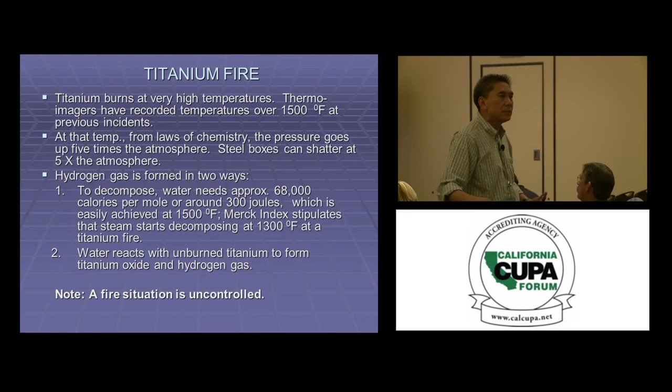They call it Met-L-X. It's a graphite powder that should be dry, and you just smother the fire and remove the oxygen from the reaction, right? That's what's supposed to happen. But it's a big pile, so they don't have that much Met-L-X graphite powder to put on the smoldering fire. So they had to call the fire department.

They told the firefighters, no, don't put water. But they did, because they didn't have a choice at that time. So, that's not mine. Because of the radiant heat, a propane tank exploded nearby. A propane tank, because of the radiant heat of the titanium fire.

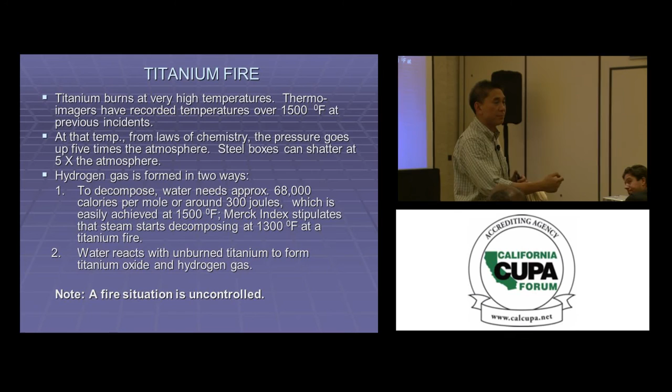That explosion triggered the video guy to record it using his phone. So he was recording it. He really did not expect that a bigger explosion was going to come out of it, and it did, right? Because the firefighters kept

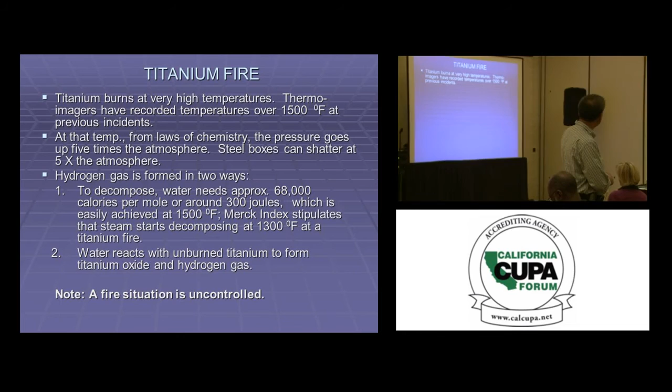drowning the titanium fire with water, and at a certain point, it just gave out, meaning the titanium fire released hydrogen gas, and as soon as it was released, it spontaneously exploded. This happens because titanium burns at very high temperatures. We have recorded temperatures of over 1500 degrees Fahrenheit. At that temperature, from laws of chemistry, Boyle's law and Charles's law and things like that, way back in elementary.

The pressure can go 5 times the atmosphere, and the steel boxes where the titanium was stored actually shattered. It's amazing that nobody died from that incident. There was only one injury, blunt injury, but I think he's okay now because it's been 2 years. He got a blunt injury because of the shattered steel box. Hydrogen gas is formed in 2 ways.

To decompose, water needs so many calories, but the Merck Index stipulates that the steam that you use to surround and drown the fire can decompose at 1300 degrees Fahrenheit. And I told you we have recorded it at 1500 degrees Fahrenheit, and it's actually not at the center of the fire. It could have been way over 1500 degrees Fahrenheit. So water decomposes into what? Water decomposes into hydrogen and oxygen.

And you told me you don't know anything about chemistry. Oh, you didn't say that. I'm sorry. She did not say that. Okay, so

it can actually decompose, or it can also react with the unburned titanium to form titanium oxide and hydrogen gas. But remember that the fire situation is uncontrolled. So aside from the big explosion, there were smaller mini explosions, because in so many pictures it seemed like a fireworks situation there.

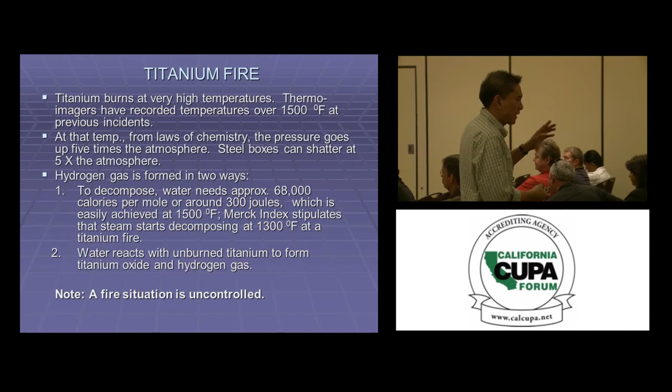Wait a minute. I was also invited to a webinar, and there have been empirical studies about suicide chemistry too. Hydrogen sulfide, especially in a car, in a smaller enclosure, can actually go all the way up to 8,000 parts per million in the breathing zone. And of course you know that IDLH is 100, and it can cause unconsciousness.

What they say is, I don't know if it's true because I have not tried it, and I won't try it, they say that it is a painless way to exit out. You become unconscious, and you keep breathing it in, and so all your systems will just give out because you're already unconscious, and that's what happens.